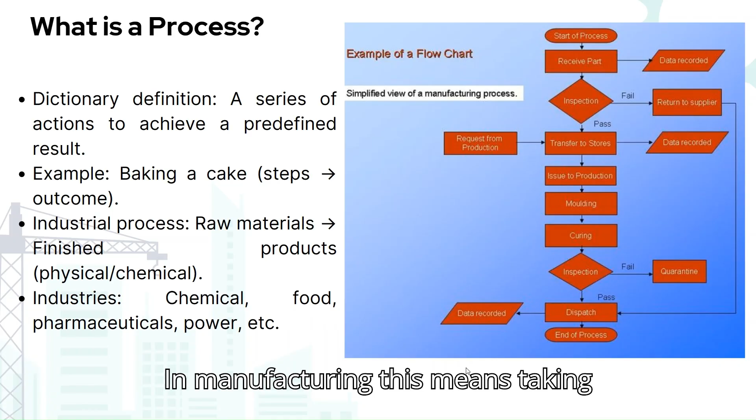You have steps, and each step builds towards that final delicious outcome. In manufacturing, this means taking raw materials and turning them into finished products through physical or chemical procedures. It's a systematic economic activity, whether it's making cars, processing foods, or refining chemicals.

Processes are not just limited to manufacturing, they can be anything from agriculture and aviation to banking, education, healthcare, retail, transportation. But in industry, some of the most popular processes include chemical, petrochemical, fertilizer, power generation, metallurgical, food processing, pharmaceuticals, and more. The big goal here is productivity with assured quality.

That's why industries are increasingly turning to automation techniques to boost output while maintaining top-notch quality.

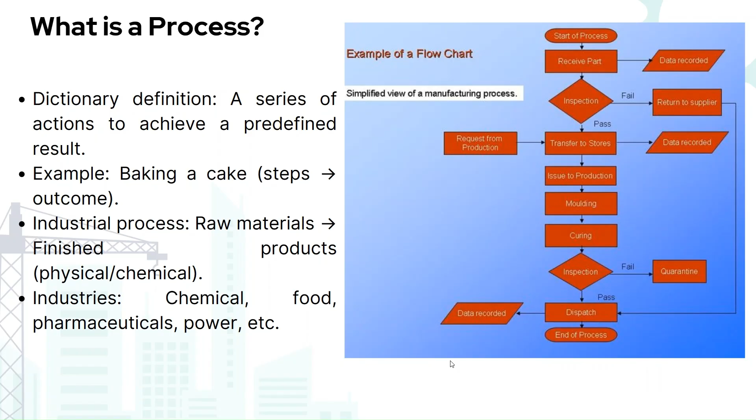Now let's move to the automation part. So, what is automation and control? The word automation comes from the Greek roots: auto meaning self, and matos meaning moving. Put them together and you get a system that moves by itself.

In other words, automation is a set of technologies that lets machines and systems operate with little to no human intervention, and it does so better than if we were doing it manually. Imagine a factory where robots are assembling parts without someone constantly pushing buttons. That's automation at work.

But to make sure an industrial process runs the way we want, we need control at every step. Control is like the brain behind the operation. It's a set of policies and techniques that keep operational parameters and sequences on track by providing the right input signals. For example, if you are controlling the temperature in a chemical reactor, the control system ensures it stays at the set point, not too hot or not too cold.

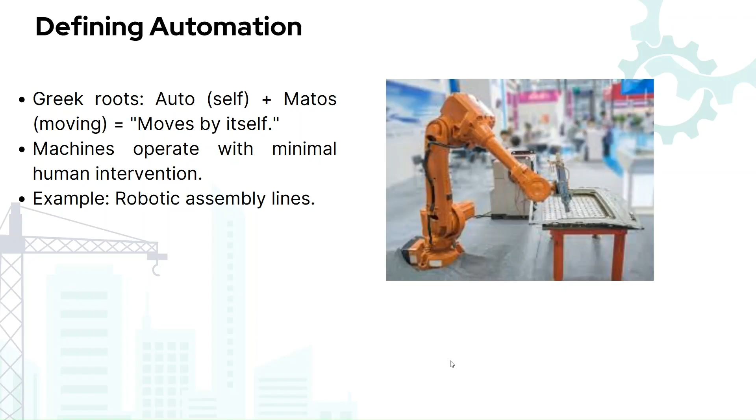Here's something important to grasp: an automation system might include a control system, but not every control system is a part of automation. The control system's main job is to make sure the output matches the desired value or set point.

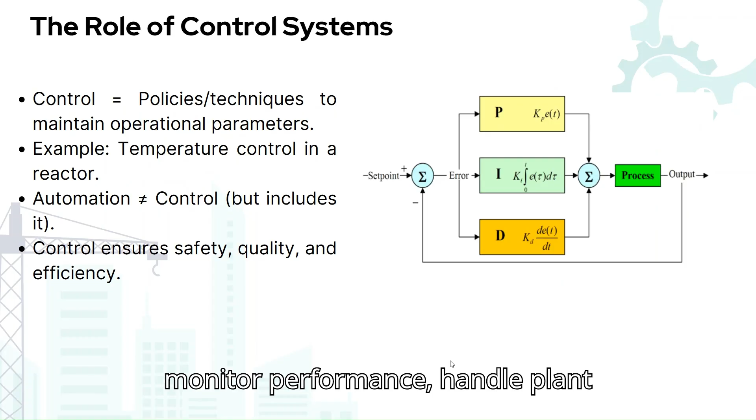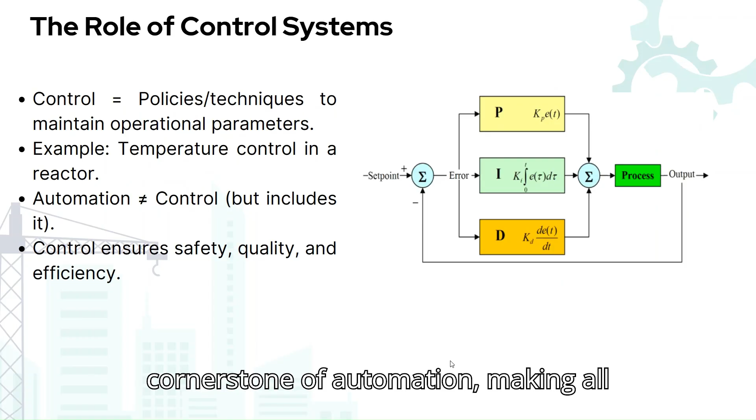Automation, on the other hand, can do more. It might set those points, monitor performance, handle plant startups or shutdowns, schedule jobs and equipment, and so on. Control engineering is a cornerstone of automation, making all these tasks physically possible.

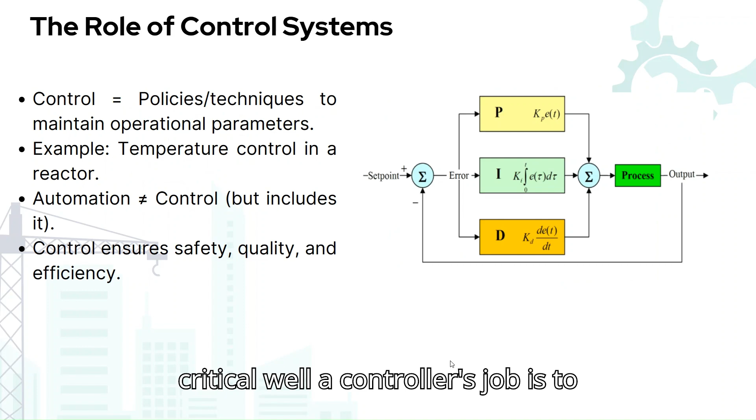So, why do you think control is so critical? Well, a controller's job is to measure a process variable like temperature, pressure, level, or flow, compare it to the set value, and take action to keep the thing steady.

Without control, process variables would drift, and that could mean wasted resources, poor product quality, safety risks, or environmental damage. That's why controllers are vital for economy, reproducibility, quality, safety, and protecting the environment.

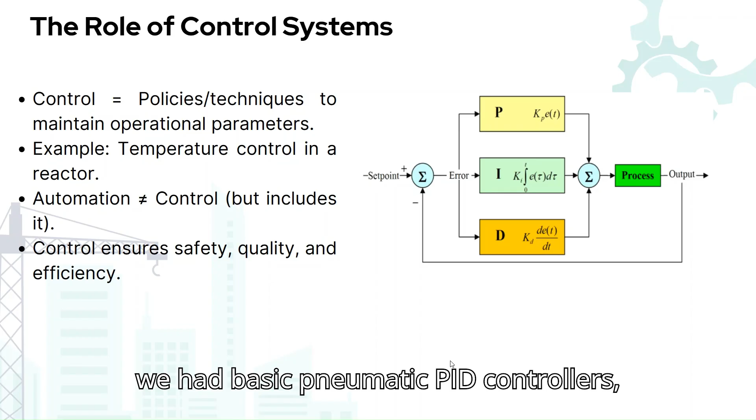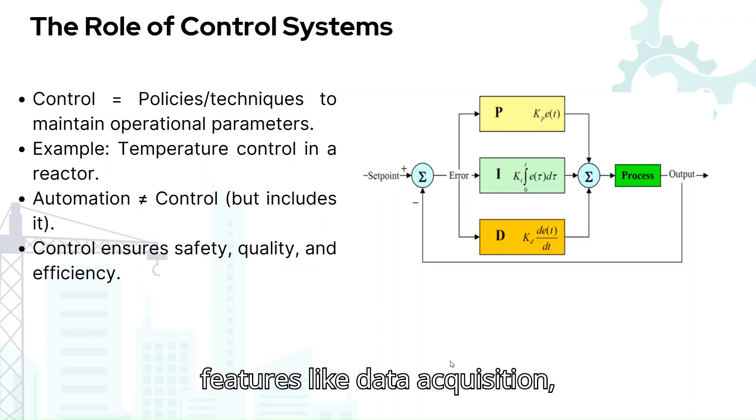Back in the day, we had basic pneumatic PID controllers - proportional, integral, and derivative - but now software based digital PID controllers are the norm, with added features like data acquisition, sequencing, recipe scheduling, and alarming.

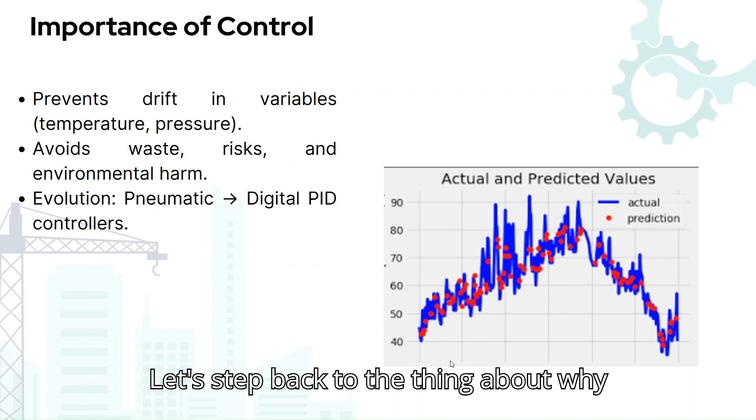So why do we need automation and how has it evolved? Let's step back and think about why automation became necessary.

In the early days, process plants were like isolated islands. Each unit operated independently, and coordinating them was labor intensive and slow. But today, manufacturing and process industries aim to deliver high quality products quickly, at lower cost, and with minimal downtime.

To maximize profit, we need to produce quality products in large volume, fast and cheaply. There are four key parameters to consider: flexibility, quality control, inventory control, and speed. Flexibility means being able to configure assembly lines and redesign facilities to stay competitive and improve quality.

Quality control today demands coordinated data collection and analysis to ensure every product meets standards. Inventory control, like just-in-time strategies, cuts overhead by reducing warehousing needs. And speed: customers operate just-in-time too. If you don't deliver on time, they lose production time and you lose customers. So how do we achieve this?

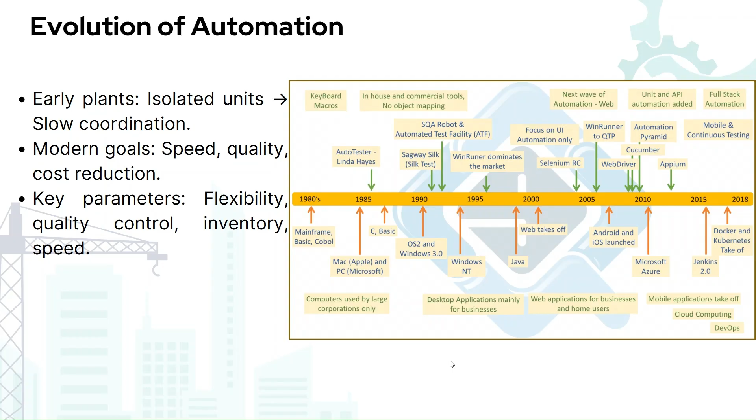In the 1970s, we saw the rise of Enterprise Resource Planning, or ERP, from companies like SAP. ERP standardized business practices but was not customizable, so companies added their own code, which created IT headaches. Then in the 1980s, the digital workforce evolved into Business Process Management, or BPM.

Thanks to IBM system-to-system messaging, BPM is customizable, API-driven, and focuses on reshaping processes for maximum efficiency. Most recently, in 2012, Robotic Process Automation, or RPA, came onto the scene. RPA uses software robots to handle repetitive tasks, letting employees focus on higher priority work. It's user-friendly, platform-independent, and requires no programming — perfect for non-technical users to solve their automation challenges.

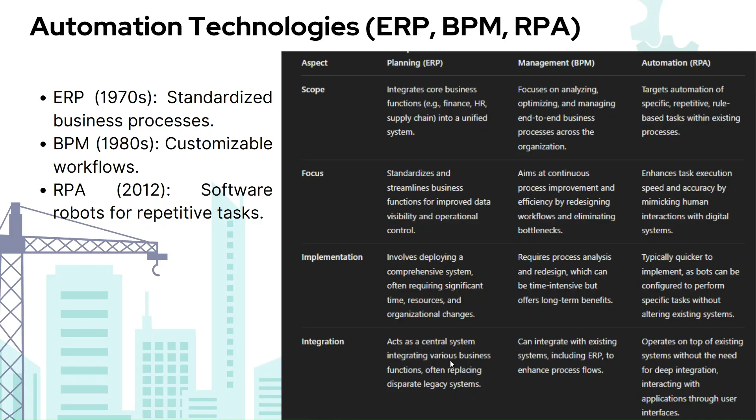The role of automation in the process industry. So what does automation actually do for the process industries? It plays a huge role. For example, an automated market study can help decide the best time to buy raw materials, and automated feedback surveys can guide product redesigns.

The benefits are clear: reduced production cost, quicker cycle time, improved quality and reliability, better floor space use, less waste, and staying competitive by hitting high throughput while keeping cost and schedules in check.

Automation ensures a quick return on investment, and robots work longer and faster, increasing production rates while maintaining precision. Imagine a robot assembling parts with the same accuracy every time — that's repeatability. And because robots are so precise, they use less raw material, cutting waste and cost.

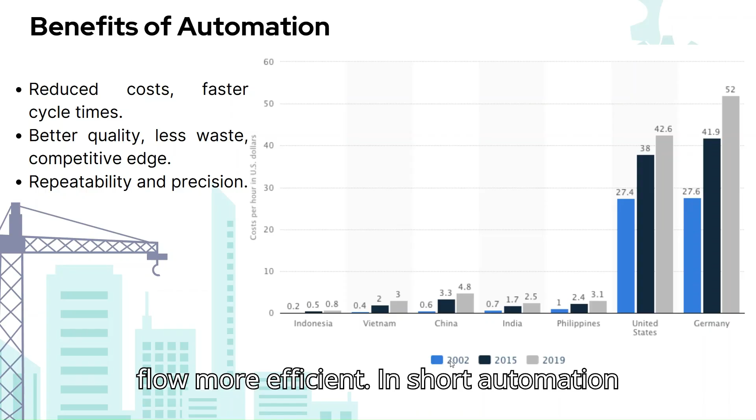Plus, automating parts of a production line frees up space for other operations, making the process flow more efficient. In short, automation keeps you ahead of the game.

So now let's talk about the architecture of the industrial automation networks. Finally, let's look at how the systems are structured. Modern industrial automation uses a five-layered communication hierarchy. Think of it like a pyramid, each layer building on the one below. So here's how it works.

Field level, that's the ground floor: sensors, actuators, and switches in the tanks, vessels, and pipelines. Sensors measure things like temperature, pressure, or flow, and send signals to the next level. Actuators like valves or pumps act on those signals to control the process.

IO level: this layer gathers all the input and output signals. It directs sensor data to controllers and sends controller demands to the actuators. Control level: here the signals from the sensors are processed, and commands for actuators are generated based on desired output. This is where PLCs, distributed control systems, and SCADA systems live.

HMI level, the human machine interface level, shows operators what's happening through organized displays. Tools like data acquisition, recipe management, and maintenance schedules help manage the processes. Operators can see the whole plant schematically, take corrective actions, and handle alarms, logs, and reports.